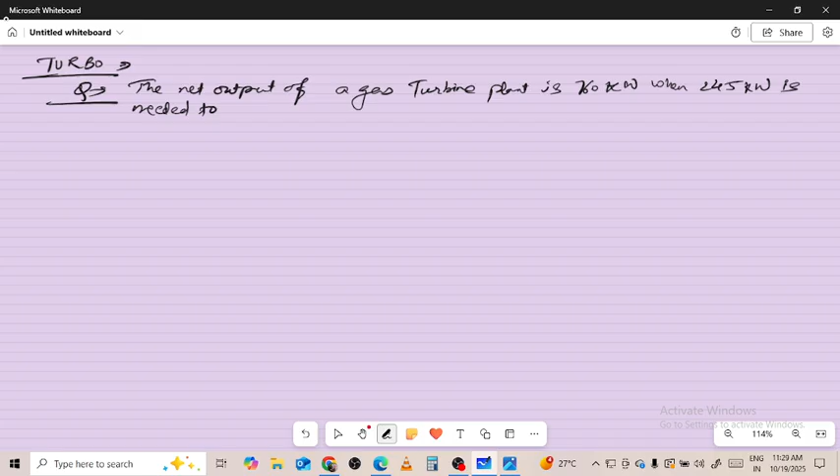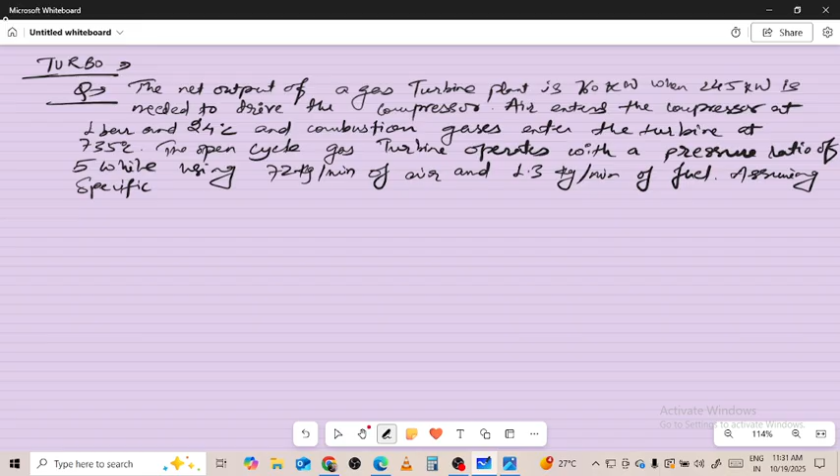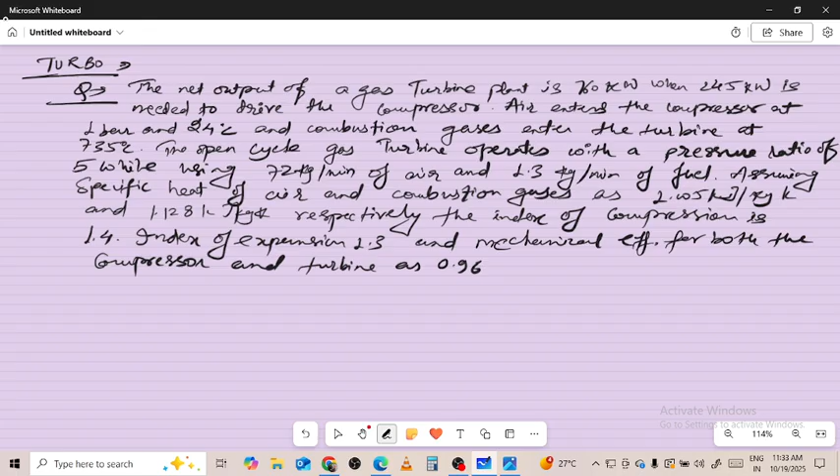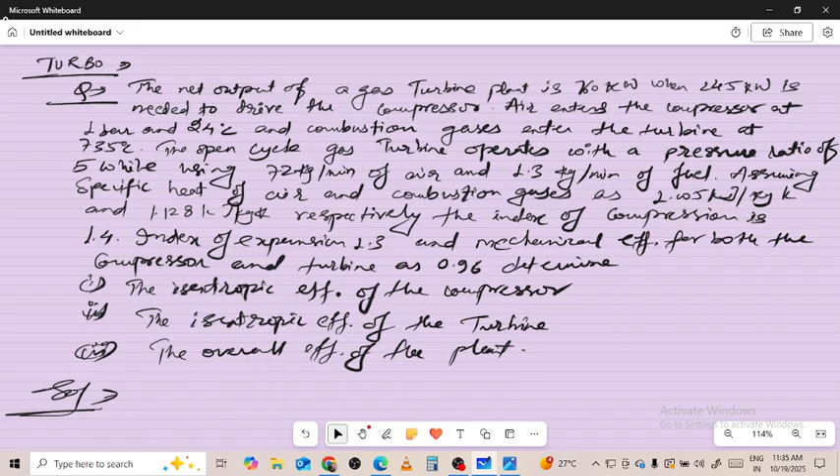ऑफ द डे हियर इट इज द नेट आउटपुट ऑफ अ गैस टर्बाइन। द नेट आउटपुट ऑफ अ गैस टर्बाइन plant is 160 kilowatt when 245 kilowatt when 45 kilowatt is is needed to drive the drive the compressor. Air enters the compressor at air enters the compressor at 1 bar and 24 degrees Celsius. 1 bar and 24 degrees Celsius and and combustion gases enter the turbine enter the turbine at 735 degrees Celsius. The the open cycle gas turbine gas turbine operates with a pressure ratio of with a pressure ratio of 5 while using 72 kilogram per minute and of air and 1.3 kilogram per minute of fuel. Assuming a assuming specific heat of air and heat of air and combustion combustion gases as 1.005 kilojoule per kilogram Kelvin and 1.128 kilojoule kilogram Kelvin respectively. The index of compression is 1.4 and the index of expansion 1.3. and mechanical efficiency for both the compressor and for both the compressor and turbine is 0.96. Determine number 1 the isentropic efficiency of compressor. Isentropic efficiency of the compressor. Number 2 the isentropic efficiency of turbine. Isentropic efficiency of the turbine. Number 3 the overall efficiency of plant. The overall efficiency of the plant. चलिए इसे सॉल्व करते हैं। यहाँ पे आउटपुट ऑफ अ गैस टरबाइन 160 किलोवाट दिया हुआ है। 245 किलोवाट इज नीडेड टू ड्राइव द कंप्रेसर। Air enters the compressor at 1 bar and 24 degrees Celsius, and combustion gases enters the turbine at 735 degrees Celsius. The open cycle gas turbine operates with a pressure ratio of 5 while using 72 kg per minute of air and 1.3 kg per minute of fuel. Assuming the specific heat of air and combustion gases is 1.005 kilojoule per kilogram Kelvin and 1.128 kilojoule per kilogram Kelvin respectively. Index of the compression is 1.4, index of expansion 1.3, and mechanical efficiency for both the compression and the turbine is 0.96. Determine the isentropic efficiency of compressor as well as turbine and overall efficiency of the plant. These are to be calculated over here on this particular question.

Shall we move ahead? Definitely. So here we are making a T-S diagram for our calculation.

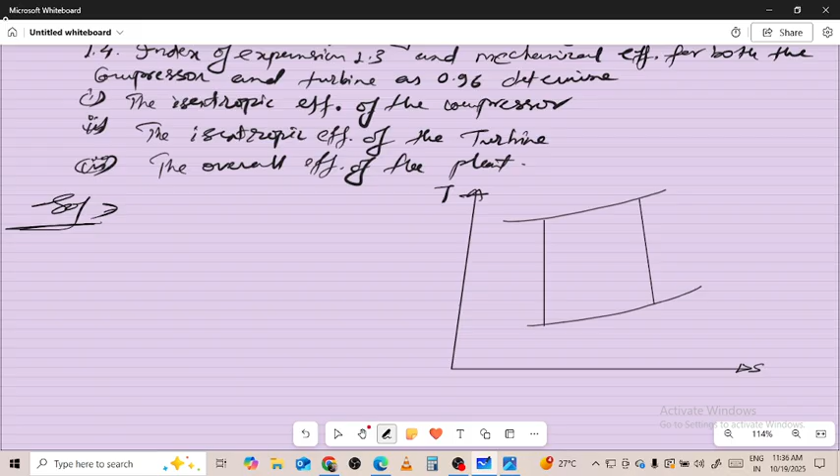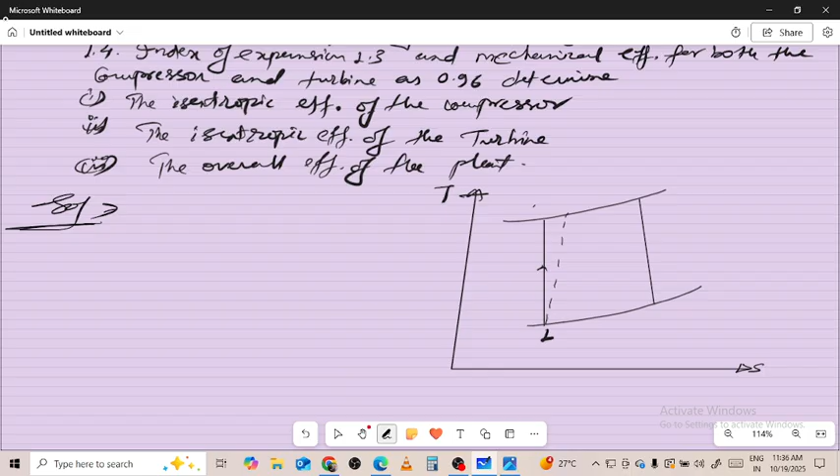Starting with points 1, 2s, 2, number 3, number 4.

चलिए गिवन डाटा लिखते हैं। Net power is equal to 160 kilowatt. Work done on the compressor side is 245 kilowatt. RP is 5.

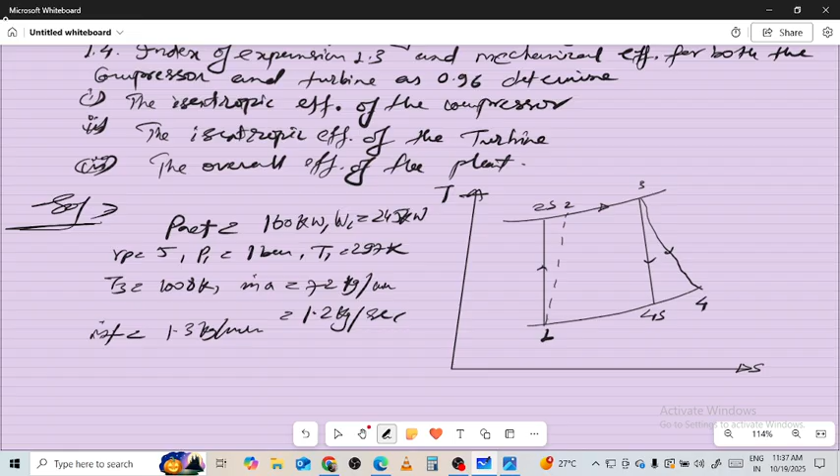T1 at 1 bar is 297 Kelvin. T3 is 1008 Kelvin. Mass flow rate of air is 72 kilogram per minute, which is 1.2 kilogram per second. Mass flow rate of fuel is 1.3 kilogram per minute, convertible to 0.022 kilogram per second.

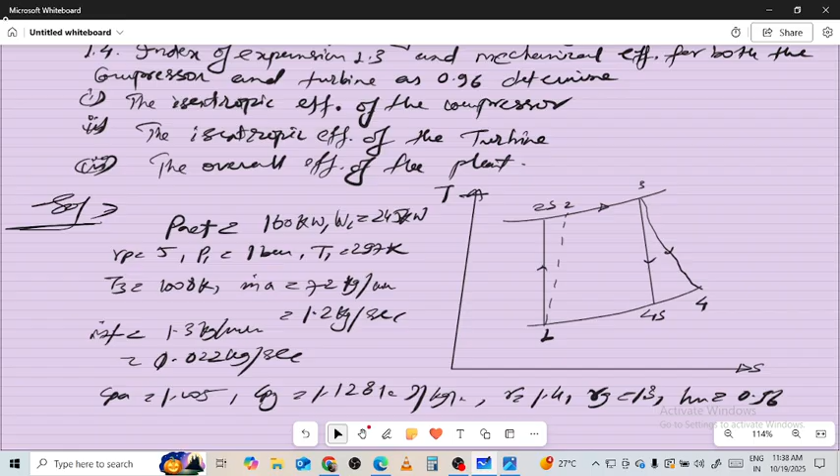Cp of air is 1.005, Cp of gas is 1.128 kilojoule per kilogram Kelvin. Gamma is 1.4, gamma g is 1.3, and mechanical efficiency Hm is 0.96. Okay, so now with the given data we have to calculate further.

Process T2S by T1 is to be treated as adiabatic, so pressure ratio raised to power gamma minus 1 over gamma. So here 5 raised to power 0.4 upon 1.4 is equal to 1.584. Now the value of T2S is equal to T1 into 1.584.

T1 value is 297. So T2S comes out to 470.39 Kelvin. And the compressor work in the isentropic process is mass flow rate of air into Cp into T2s minus T1.

So here we put the value: 1.2 into 1.005 into 470.39 minus 297. The value comes out to be 209.11 kilowatt. Now the actual work required to drive the compressor is to be calculated.

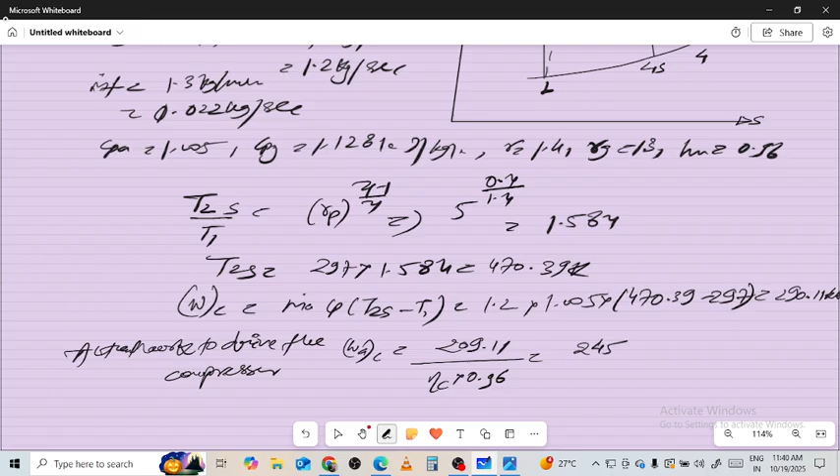Actual work required to drive the compressor, WA of C, equals 209.11 upon efficiency of compressor equals 245 kilowatt, with efficiency as 0.96.

Now working it down the track, the isentropic efficiency of the compressor comes out to be 88.91%.

For the turbine, we have T3 by T4S equals Rp raised to power gamma g minus 1 upon gamma g. Since expansion process is happening in the turbine, this is 5 raised to power 0.3 upon 1.3, which comes out to 1.45.

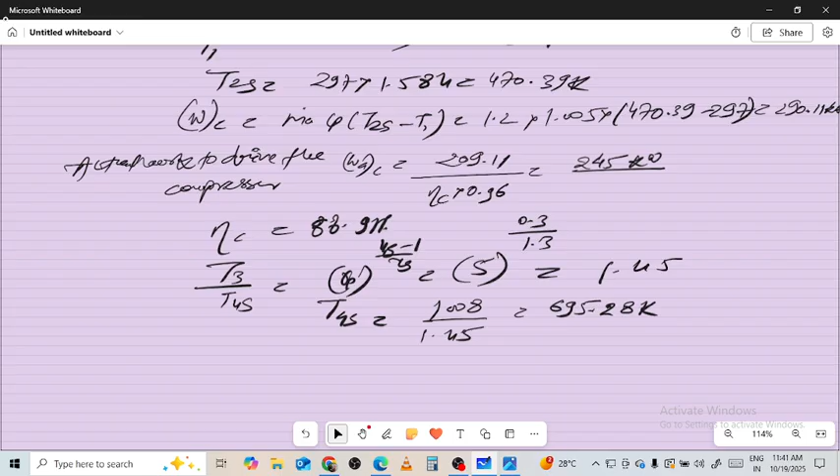The value of T4S is to be 1008 divided by 1.45, which comes out to 695.28 Kelvin. Now, mass flow rate of the gas is mass flow rate of air plus mass flow rate of fuel.

It is to be 1.2 plus 0.022, equal to 1.22 kilogram per second.

The isentropic work done by turbine equals 1.22 into 1.128 into T3 minus T4S, which comes out to 430.35 kilowatt.

Actual work done will be isentropic work into mechanical efficiency of turbine: 430.35 into 0.96, which gives 413.1 kilowatt.

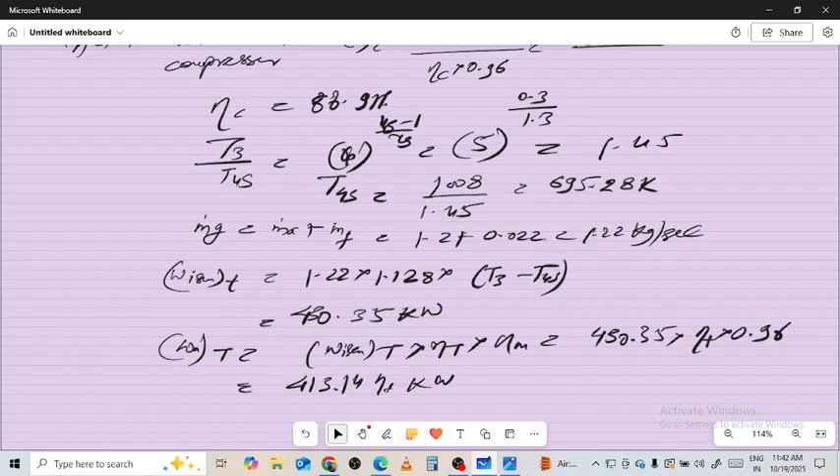There is to be a net power supply. So our actual work will be turbine's actual minus compressor's actual. It is 160 equals 413.14 ηT minus 245. So NT is equal to 0.98, that is 98.03 percentage.

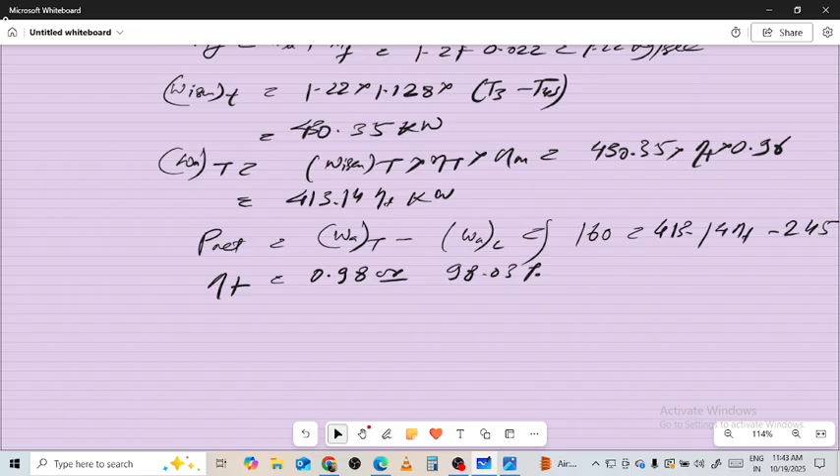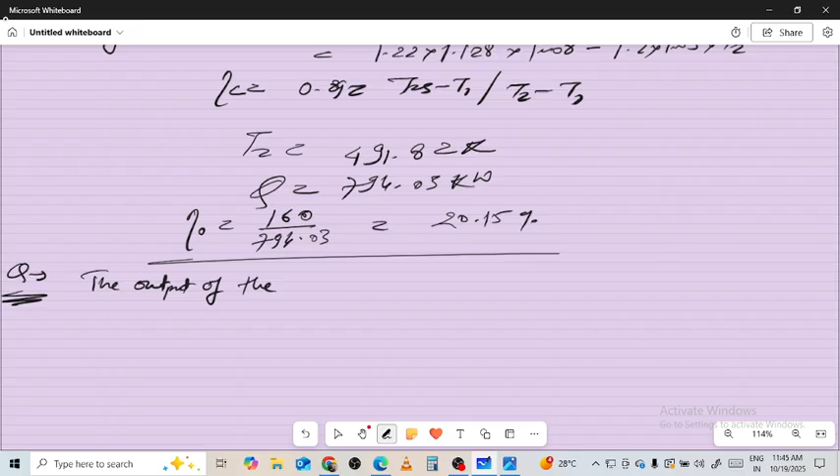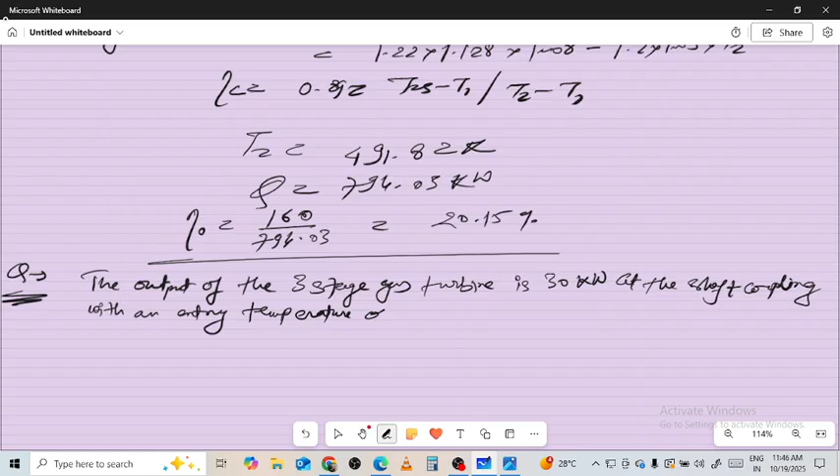The output of the three-stage gas turbine is 30 kW at the shaft coupling, with an entry temperature of 1500 Kelvin. The overall pressure ratio across the turbine is 11 and efficiency is 88%.

If the pressure ratio of each stage is the same, determine number 1, pressure ratio of each stage.

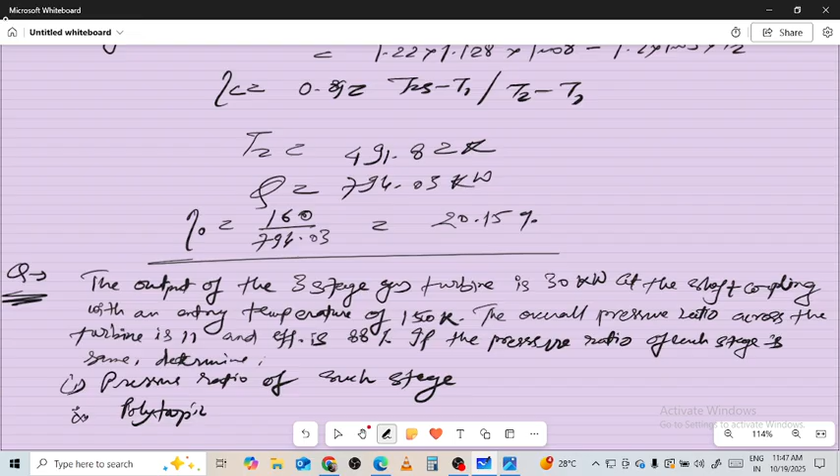Number 2, we need to calculate polytropic efficiency. Number 3, mass flow rate of air. After that, number 4, efficiency and power of each stage.

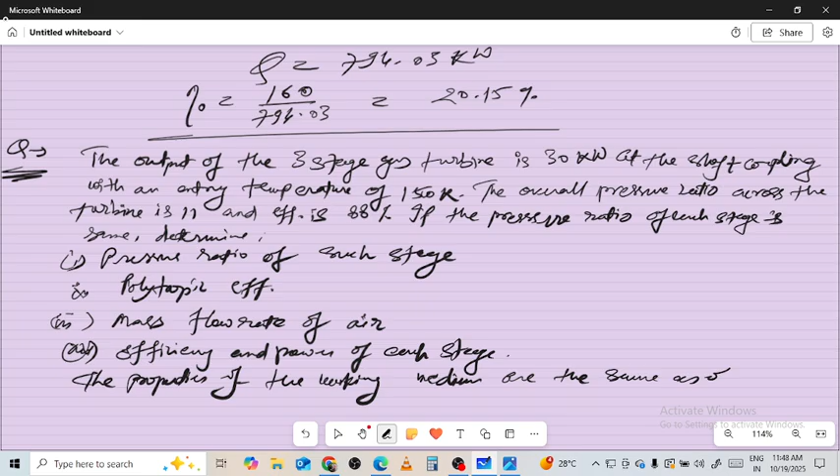Now the properties of the working medium are the same as of air. Gamma is equal to 1.4, Cp is 1.005 kilojoule per kilogram Kelvin. Assume an efficiency of 91% to take into account shaft losses due to disk and bearing friction.

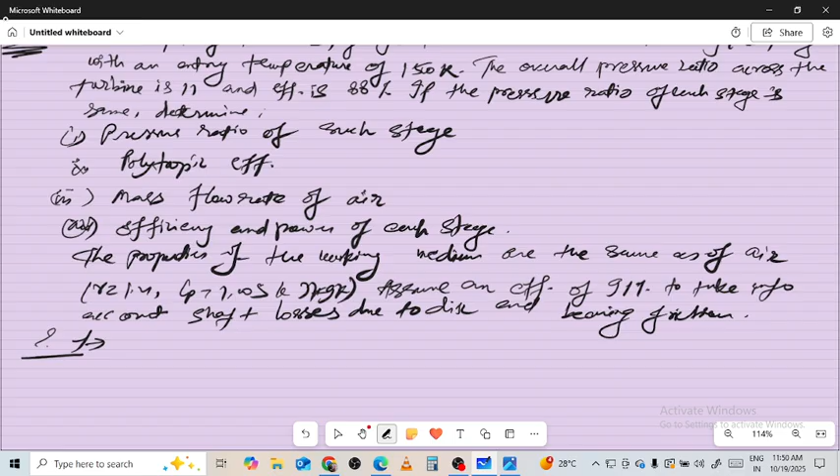Let's repeat and telecast the question once again for you. The output of the three-stage gas turbine is 30 megawatt at the shaft coupling with an entry temperature of 1500

Kelvin. The overall pressure ratio across the turbine is 11 and efficiency is 88%. If the pressure ratio of each stage is same, determine the pressure ratio of each stage, polytropic efficiency, mass flow rate of air, efficiency and power of each stage.

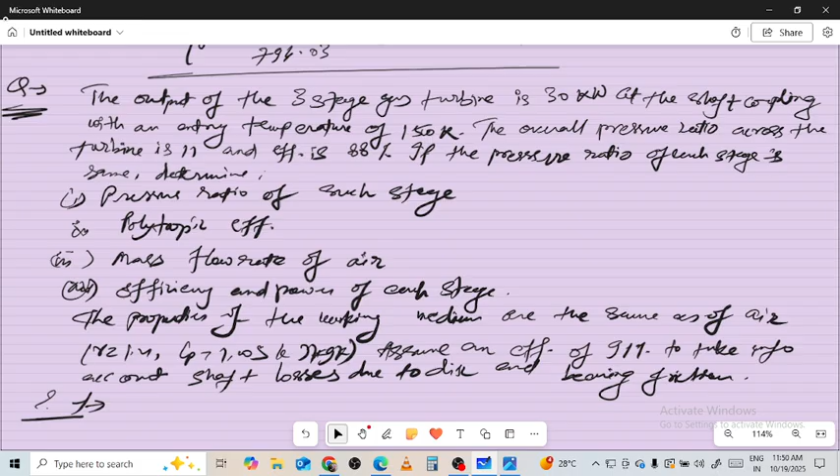The properties of working medium are same as of air. Gamma is 1.4, Cp is 1.005 kilojoule per kilogram Kelvin, and assume the efficiency 91% to account for shaft losses due to disk and bearing friction. This we need to calculate. So here is our solution of the question.

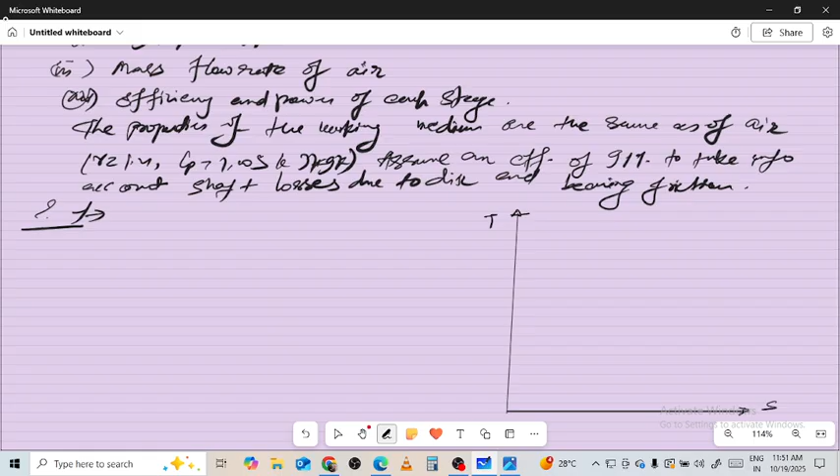The temperature T1 to T2s up to 2. Here the pressure lines are to be there, P1 and P2.

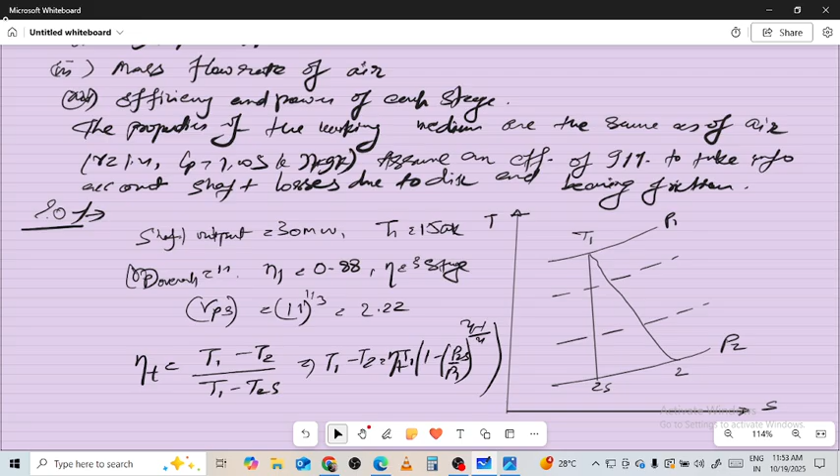So here T2 is equal to 1500 minus 655 after the calculation. So 845 Kelvin is calculated.

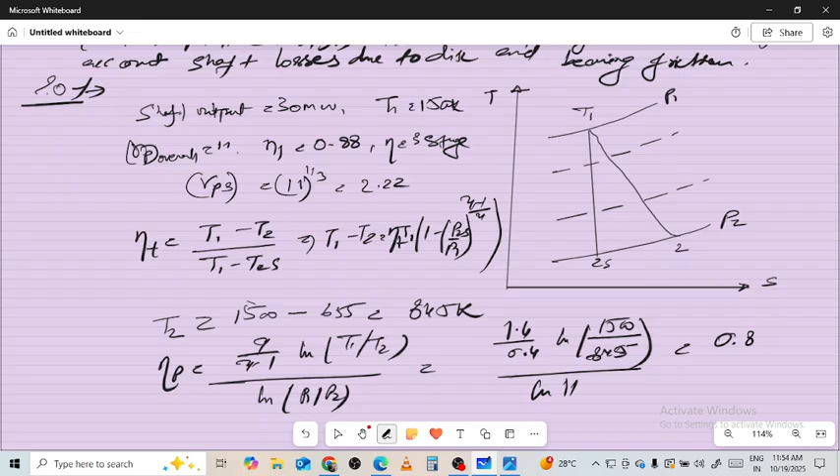Efficiency of polytropic is equal to gamma upon gamma minus 1, log of T1 upon T2 division over the log of P1 upon P2. So value is 1.4 upon 0.4, log 1500 upon 845 division log of 11. So the value comes to 0.837.

Okay, mass flow rate into Cp, T1 minus T2, is equal to 30 into 10 cube division over 0.91. So the mass flow rate is equal to 50.08 kilogram per second. Now, as pressure ratio is same across each stage, so stage efficiency is 1 minus RPS raised to power

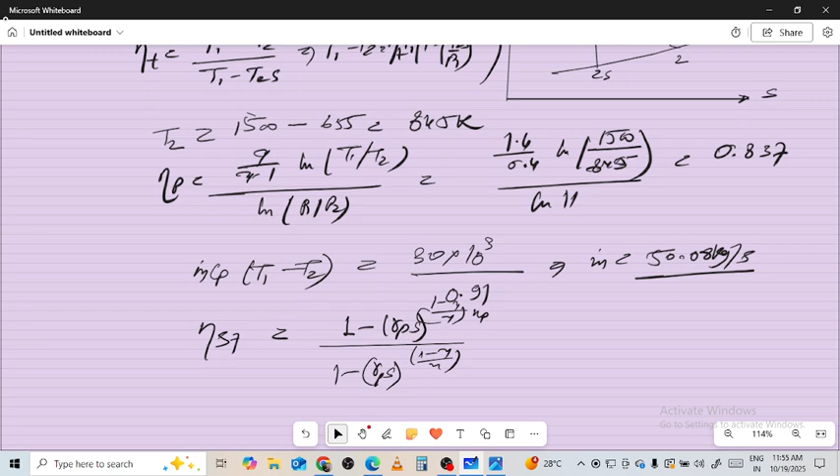1 minus gamma upon gamma, efficiency of polytropic, division over 1 minus RP of the stage, 1 minus gamma upon gamma. Okay, so put this value in the equation. We have 1 minus gamma upon gamma is equal to polytropic efficiency multiplied with minus 0.4 upon 1.4, 0.837 minus 0.2394.

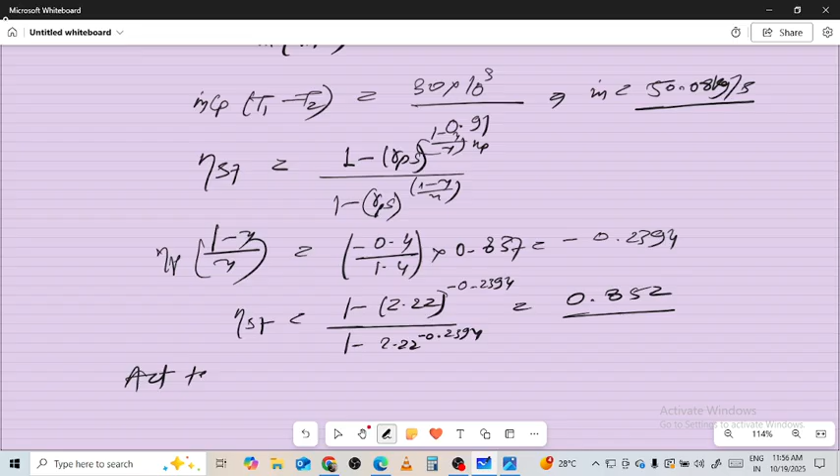Temperature drop of each stage. Delta T1, 1 minus Rp, 1 minus gamma upon gamma, Np. So here the value we get is 1738 by 1000. Now the delta T1 is equal to 0.1738 into 1500, which is 260.7 Kelvin.

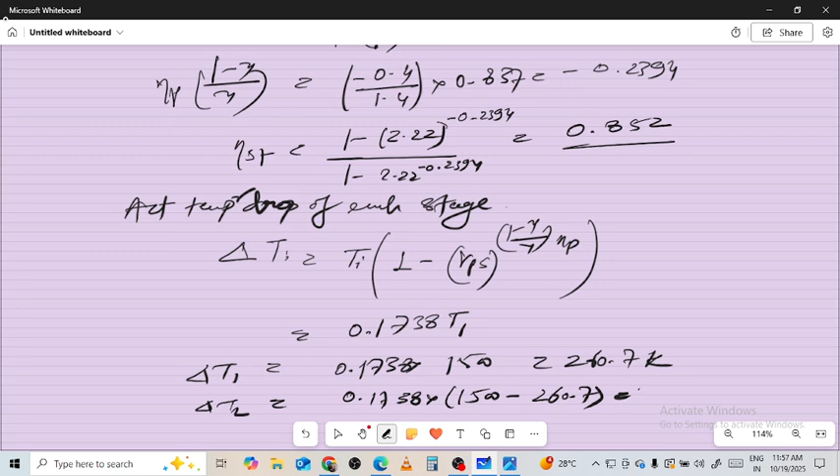Delta T2: 0.1738 into 1500 minus 260.7. So the value comes out to 215.39 Kelvin,

Now the power developed in each stage. P1 is equal to 50.08 into 1.005 into 260.7, which is 13.121 megawatt.